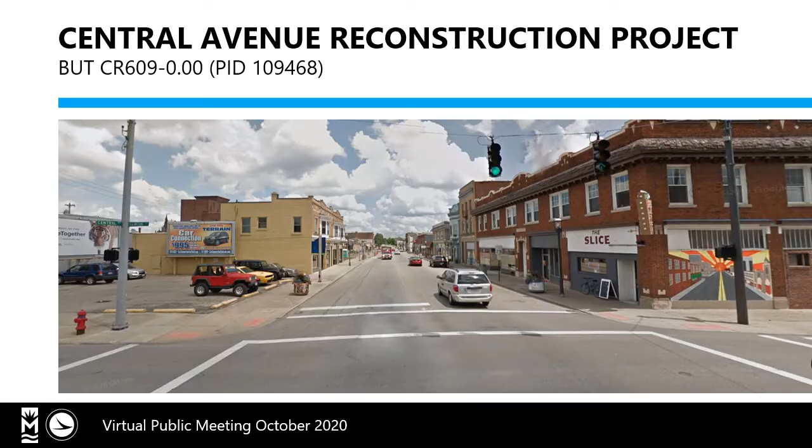The City of Middletown and the Ohio Department of Transportation welcomes you to our virtual public meeting for the proposed reconstruction of Central Avenue in Middletown, Ohio. Whether you're a nearby resident, business owner, employee, or local driver, we want to give you the latest information on this upcoming project, hear your comments and concerns, and answer any questions you may have.

In this presentation, we will describe the proposed project and explain its purpose, go through the infrastructure improvements and design elements that are included with the reconstruction, discuss maintenance of traffic and detour information during construction, explain Section 106 consulting party information, and talk about the next steps and project schedule.

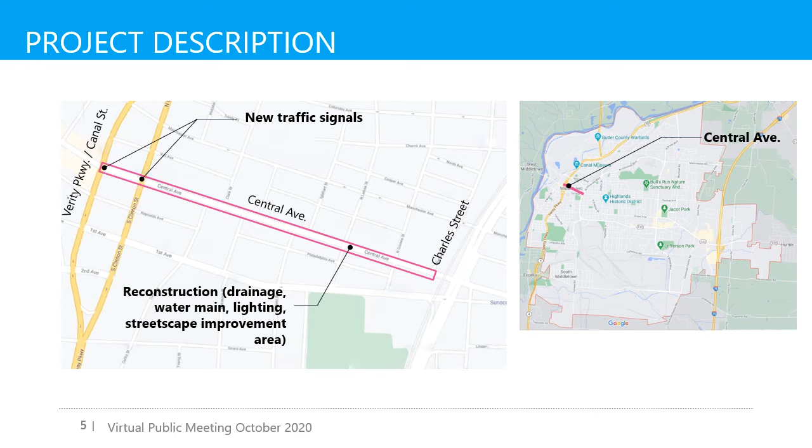The proposed project consists of roadway reconstruction, including drainage, water main, lighting, and streetscape improvements to Central Avenue from Verity Parkway, or Canal Street, to Charles Street in the City of Middletown. The project also includes the replacement of 2 traffic signals at the intersections of Central Avenue and Verity Parkway and Central Avenue and Clinton Street.

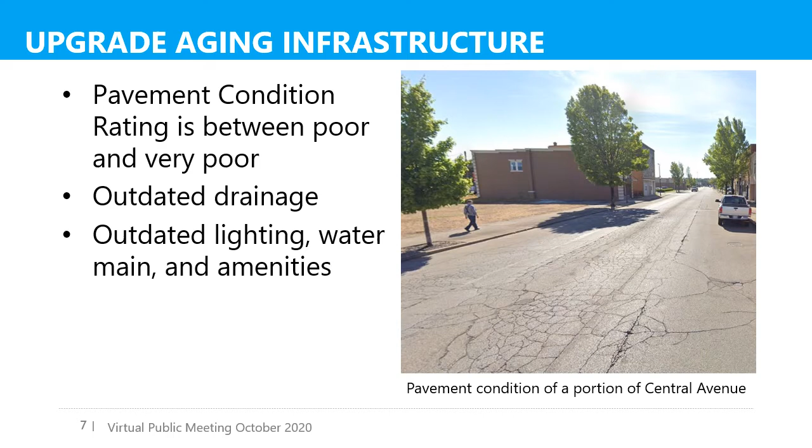There are 2 main reasons why this project is needed: to upgrade aging infrastructure and to improve safety. The project is needed to upgrade the aging infrastructure that exists in Central Avenue. ODOT's Pavement Condition Rating, or PCR, for Central Avenue is 40, which is the threshold between very poor and poor. The lighting, water main, drainage system, and overall amenities along Central Avenue are also outdated.

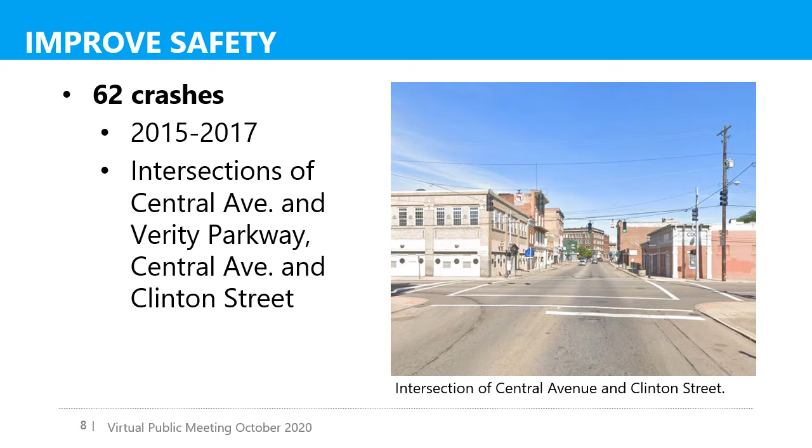The project is also needed to improve safety for vehicles and pedestrians. A significant component of the project is intersection improvements at Central Avenue and Verity Parkway and Central Avenue and Clinton Street. A total of 62 crashes occurred at these intersections in 2015, 2016, and 2017. This project will mitigate these crashes by updating signal equipment, retiming signals based on current traffic patterns, and installing left turn lanes on Central Avenue.

We discussed the need for infrastructure improvements for Central Avenue, but what will we be updating? The project will replace the pavement, curb, sidewalk, and water main, upgrade the existing street and pedestrian lighting, provide a new storm sewer, and other functional streetscape amenities.

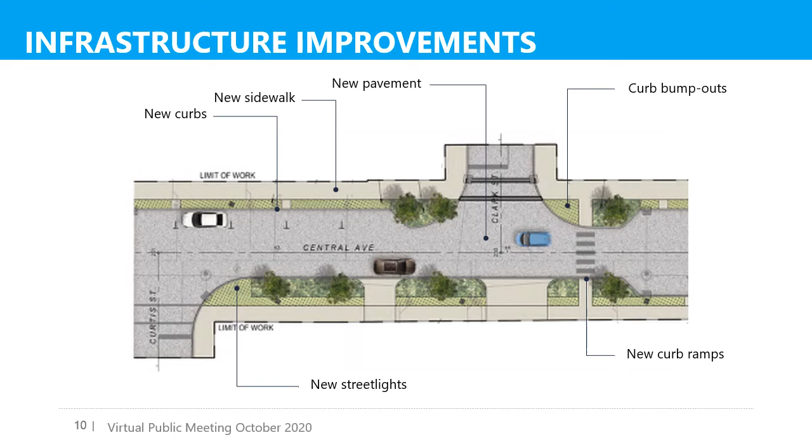The upgraded streetlights will come equipped with Wi-Fi, cameras, and processors. The intent is twofold: 1, to create a public Wi-Fi network accessible to those visiting the downtown area, and 2, to collect data that could be used in transportation analyses and decision-making. Data can include traffic volumes, pedestrian volumes, and information on potential safety issues, among other things. The city plans to partner with OKI and share and analyze the data.

Vegetation and tree wells are planned to be installed in conjunction with the curb bump outs, as shown in this image of the proposed improvement of Central Avenue.

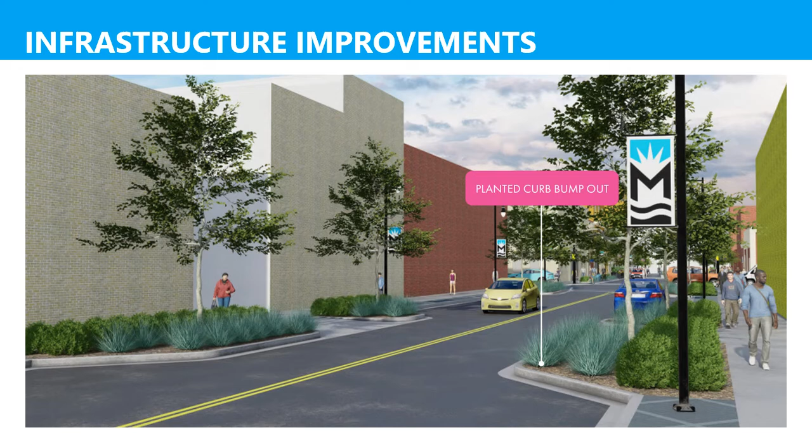The project will also improve safety by installing new signals, updated signal timing, and left turn lanes on Central Avenue at the existing signalized intersections, upgrading sidewalks and curb ramps for pedestrians, and adding bump outs to reduce speeds at intersections. Make sure to navigate to the bottom of the Infrastructure tab on the Public Input webpage to comment about improving the operations of the signalized intersections.

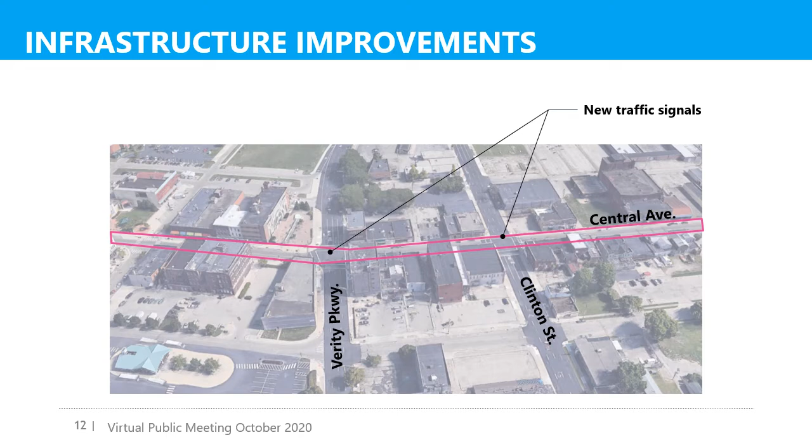While addressing infrastructure concerns, the reconstruction of Central Avenue also provides an opportunity to visually upgrade the corridor with new design elements.

Gray pavers in a diamond pattern create an amenity strip that brings interest to the sidewalks while also providing a permeable surface for water. The amenity strip will include metal benches, planters, light poles, banners, hanging flower pots, and street tree planters.

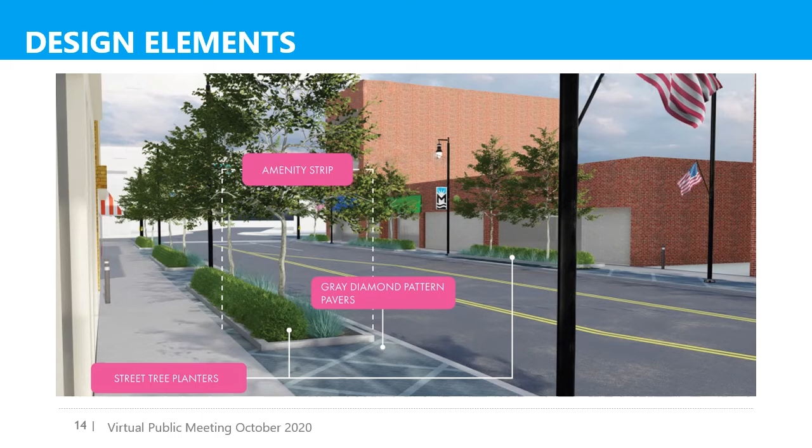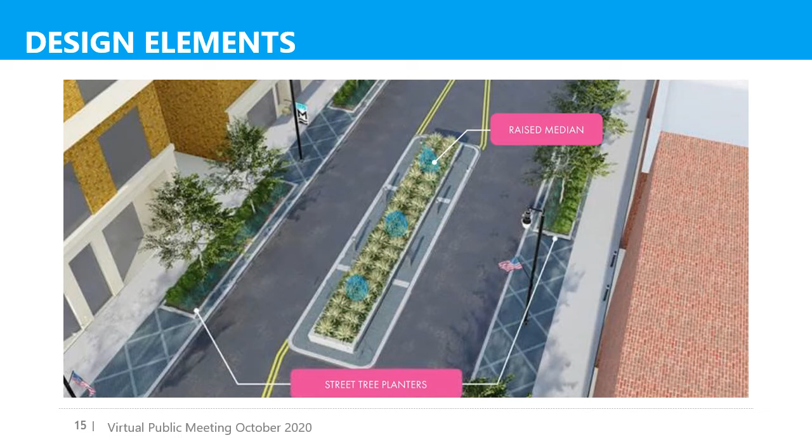During construction, traffic will be rerouted in 3 different phases. Access to businesses will be maintained throughout all 3 phases.

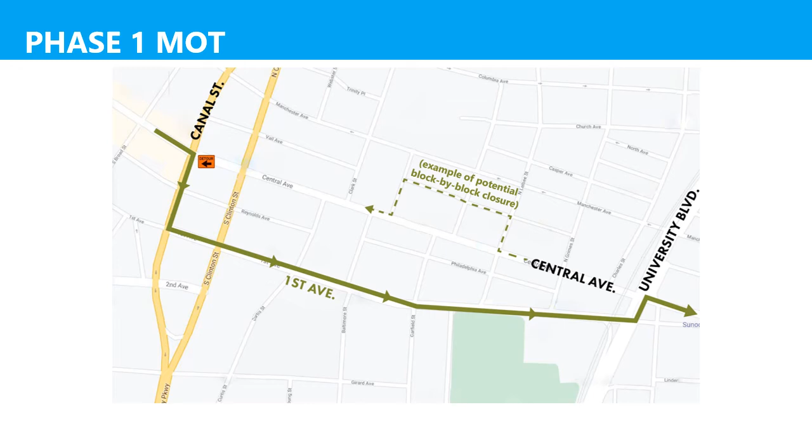During Phase 1, eastbound traffic is rerouted to First Avenue. Daily detours of westbound traffic may occur on a block-by-block basis, which is represented here by the green dashed line. Pedestrian traffic will be rerouted to the north sidewalk.

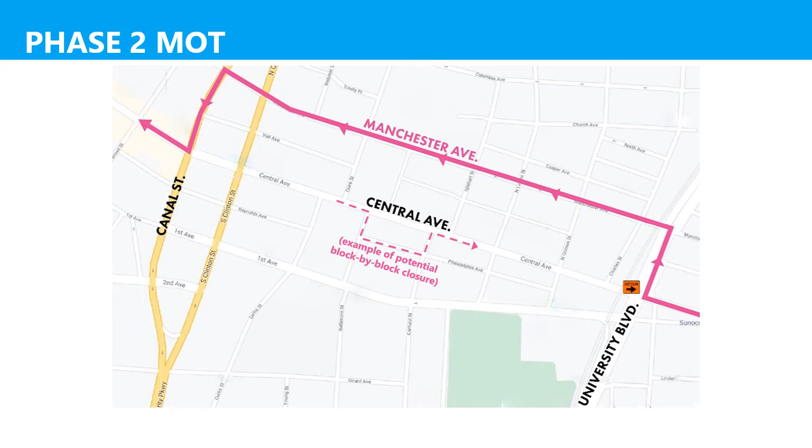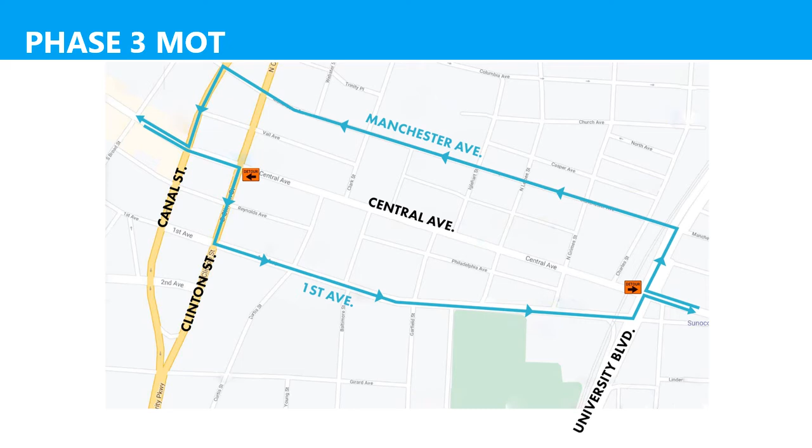Make sure to navigate to the bottom of the Maintenance of Traffic tab on the Public Input webpage to comment about on-street parking during construction. Construction is estimated to begin March 2022 and be completed in November 2022, for a total of 8 months. Because of Central Avenue's historic significance, the city is seeking consulting parties for the replacement of the roadway moving forward in the project development process.

Section 106 of the National Historic Preservation Act of 1966, as amended, requires federal agencies to take into account the effects of their actions on historic properties. In the Section 106 consultation process, the federal agency must comply if the undertaking is of a type of activity that has the potential to affect a historic property. The Section 106 process seeks to incorporate historic values into project planning through consultation among agencies and other parties with an interest in the effects of the undertaking on historic properties.

Individuals or organizations with a demonstrated interest in the effects of the undertaking on historic properties can become a Section 106 consulting party. The various consulting parties work together to discuss options, provide multiple viewpoints, and strive to seek common agreement on the incorporation of historic preservation values into the project.

There are both required consulting parties and invited consulting parties. Required parties include the State Historic Preservation Office (SHPO), the Ohio Department of Transportation, the Federal Highway Administration, and the local public agency associated with the project. Invited consulting parties include individuals or organizations with a demonstrated interest in the effects of the undertaking on historic properties.